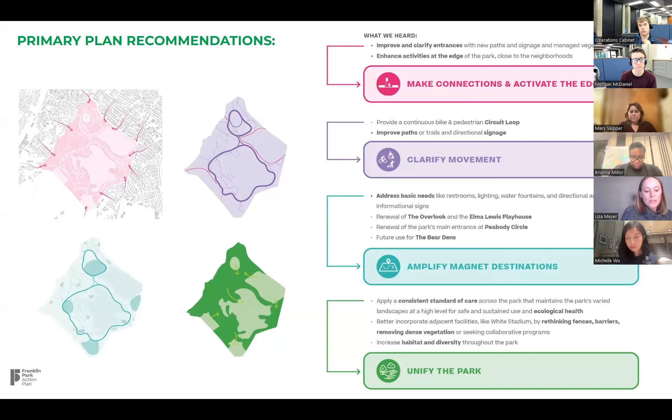These primary plan recommendations focus around circulation, improving the ecological health of the land, welcoming people into the park, and renewing key features, all of which together compose the foundations of this place that we love.

Here we're looking specifically at the Playstead, one of 4 key magnet destinations in the park. It's a destination for athletics, events and gathering, framed by the trees, trails and rock outcroppings at Long Crouch Woods to the east, and the stone terrace of the Overlook to the west. That's number 4, the Overlook, and Long Crouch Woods is 1 and 2. White Stadium sits within this larger space.

As the mayor noted, the Parks Department is working on improvements at the Overlook — we're at the very beginning stages — and at the Bear Dens. Each of these, including work at White Stadium, needs to take the larger Playstead into account when making design and programming choices for these contributing sites. All of these spaces together become the larger Playstead.

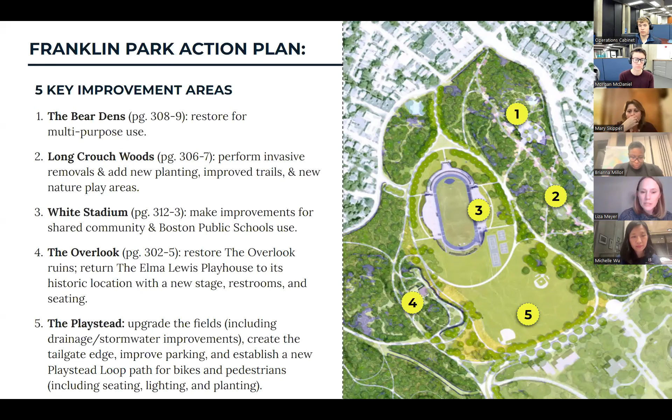The action plan itself reinforces the idea of the Playstead Fields as a central gathering space as conceived by Olmsted. All of the key program destinations surrounding the Playstead will be linked through pedestrian and bike circulation, spaces for spectating and people watching, and restoration of natural features.

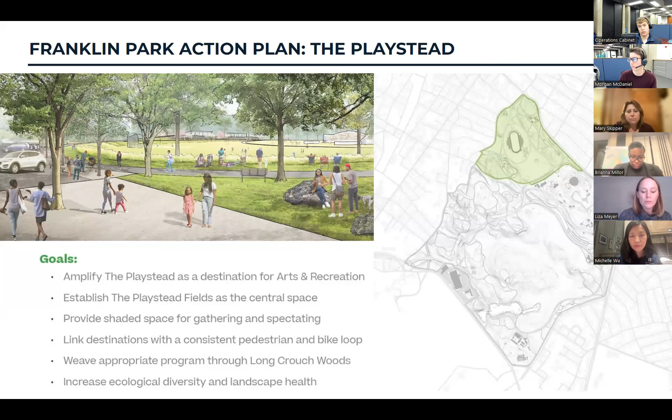As those of you who have been closely involved in the action plan process know, the plan recommendations extend across management, maintenance, and capital investments. To make good on this, the mayor has made significant commitments to plan implementation in all 3 areas. I'm going to pass it to Cathy Baker-Eclipse to highlight some of those.

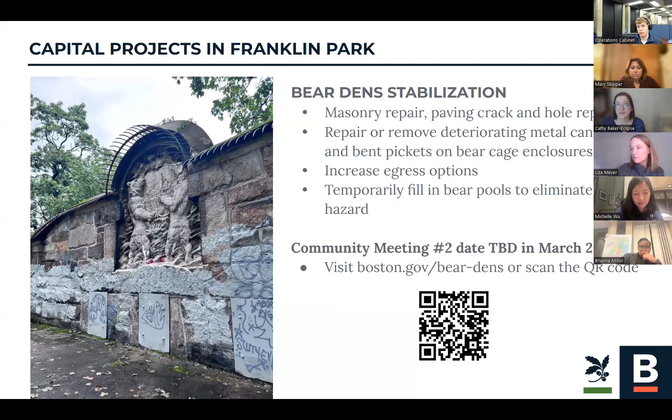All right, next slide.

Highly relevant to the White Stadium conversation we're having tonight is what the plans are for the Overlook Shelter area. The Franklin Park Action Plan recommended returning the Elma Lewis Playhouse to the Overlook Shelter as it was in the 1960s and 70s. We're at the very beginning stages of that work through a programming and design study to figure out what the space needs to accommodate the Elma Lewis Playhouse program and how it relates back to the Playstead. We've received interest in the project from several design firms and are currently reviewing their information.

As we get further into this design process, keep an eye out for more from us throughout 2024 as we have community conversations and work through the schematic design.

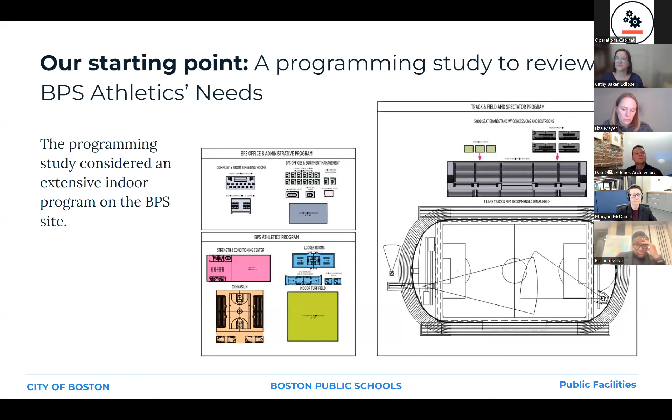As we were considering all of these amazing programs that we wanted to be able to deliver for BPS, the city doesn't have all of the resources that we would want to have to be able to do everything we want to do for our students.

So therefore, we pursued a public-private partnership we're really excited to be pursuing. It's going to allow us to deliver more than the city could do on its own—rebuilding White Stadium to its existing capacity of 10,000 seats, a high-quality natural turf field, plus state-of-the-art student athletic facilities, plus a maintenance partner that will help us sustain the quality of investment.

And besides that, we're excited about the partnership with Boston Unity Soccer because of all the benefits that professional women's soccer brings, including mentorship for student athletes, civic and community pride, and the advancement of women and girls athletics.

So once we had that partnership in place, I will hand it back to Dan to talk about what the rest of that process looked like.

Going back to the programming and visioning exercises we talked about in the prior slide, we looked at adding the indoor courts and a half-size turf field onto the site, and also implementing some of this program on the east side. The buildings started to become larger in size and height, and it felt like we were imposing too large a structure on the park. We wanted to scale back some of the wish list items from the visioning exercises to make this facility more appropriate for the context.

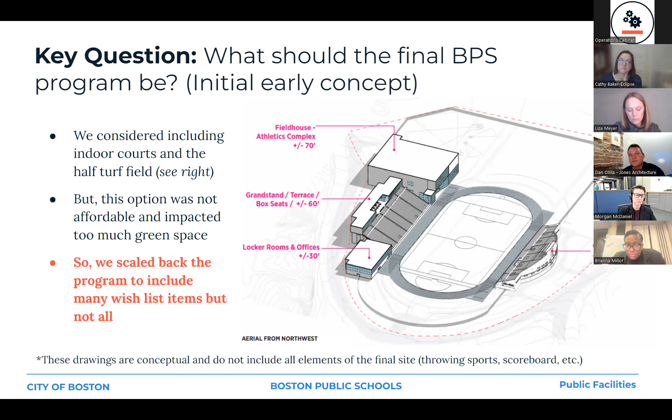So we did a couple different studies to achieve that. If you move to the next slide.

One of the first steps we looked at with the Boston Unity Soccer design team was the possibility of implementing an 8-lane track and a FIFA regulation soccer field onto the site while maintaining the existing East Grandstand. So we did some studies to try to test that out.

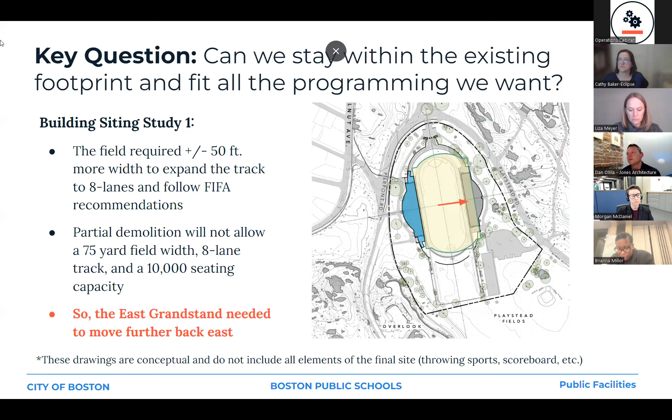And you can go to the next.

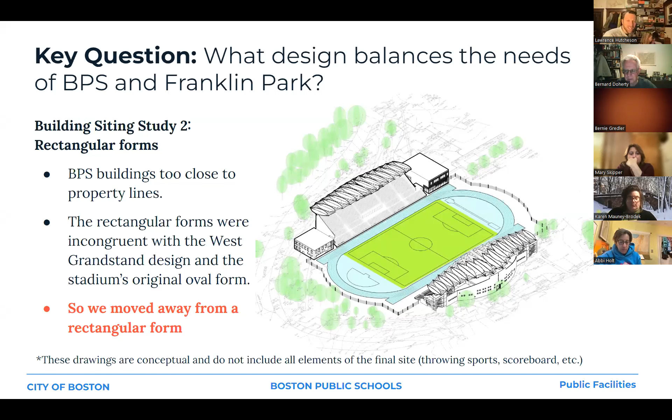So if you move to the next slide, we landed in a place where, rather than make the buildings on the north and south side more square and occupy more horizontal area throughout the park, we made them much more narrow and longer, hugging the shape of the track. As you'll see in more slides about the development of the Grove and West Side area, these building forms and this approach to siting start to unify the two ends of the stadium, even though there is an openness in between each side at the north and south.

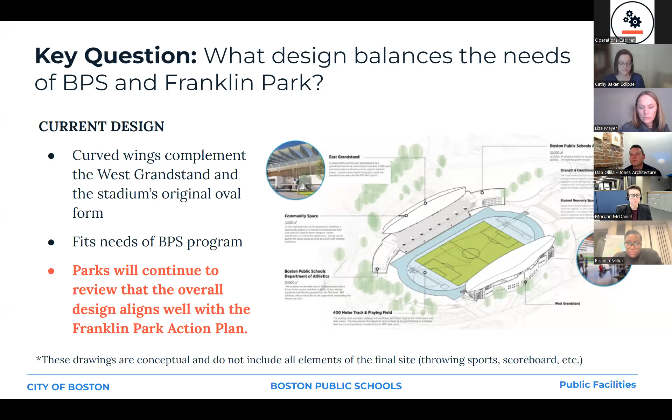You can move to the next. I will pass it to JP from our landscape team to talk in a bit more detail about how this fits into the Franklin Park Action Plan.

Thanks, Dan. Good evening. My name is Jean-Paul Charbonneau, but I go by JP. I'm a Boston resident living in Dorchester, about 1.5 miles from Franklin Park. I'm an associate principal with Crowley Cottrell, the landscape architects on the BPS side of the White Stadium project. I'm here to talk about the future improvements to the site.

Before we begin, I'd like to show this drawing to illustrate how the stadium project is split: the Boston Unity project shown in purple and the BPS project shown in orange. The city and the Boston Unity teams are working together to ensure this project feels cohesive and unified. Next slide, please.

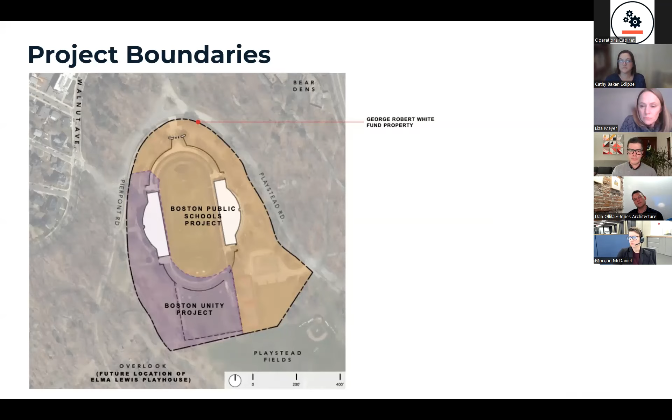This drawing is an overlay of all the new and expanded buildings for the project, shown in blue, which include the West Grandstand for Boston Unity, the East Grandstand and the two wings for BPS offices and fitness center, the expanded track and field, and the Grove buildings. Next slide, please.

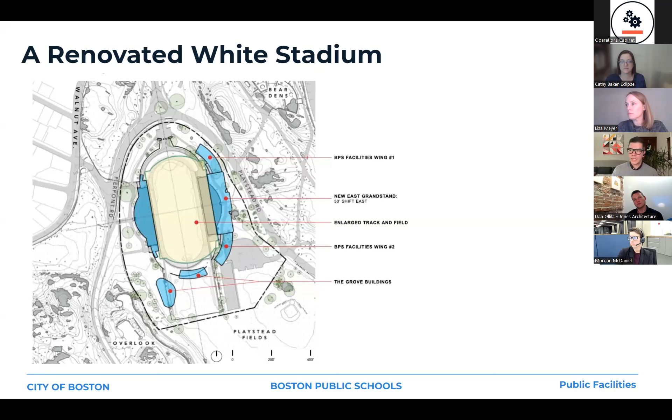Shown here is the combined site plan. I will describe the various aspects of the plan in more detail in the next slide, but more importantly on this slide are the overall goals from the action plan and our primary objectives with this project.

It would be impossible to reduce the action plan to one slide, and to do so would be a disservice to the amount of time, thought, and community feedback that went into it, but these would be those four principles taken from the action plan itself. Below each goal is a description of how we intend to achieve them. In the interest of time, I will not read through these bullet points, but I will touch on these as we walk through the site plan.

The only thing I would add: these goals not only apply to our site, but it is on the project team to consider how our site affects these goals for the park. Our challenge and primary task is to make the stadium feel integrated with the park. We put these goals to the test.

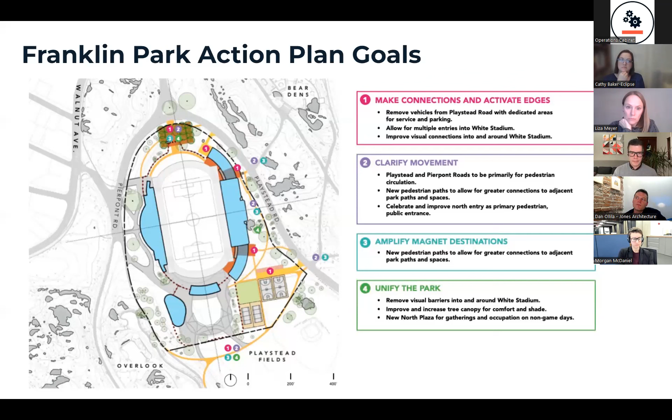Now a little more information for the combined site plan. Before I get into it, I want to state that we are at the very early stages of design. This is very much a concept of what is possible. Nothing is set. All options are on the table. But we show this now because we want to use this opportunity to share some of our early ideas, to begin our conversation, to get your feedback, and to provide you all with a fuller understanding of the changes we are studying. I understand there's a lot of information on this page, and it is a lot to digest.

We will have more conversations, and in future meetings, we will provide additional drawings and details as we test and study how these changes will look and feel. I will try to explain this drawing as briefly and as completely as I can.

In this drawing, Boston Unity's scope and paving are shown in gray, and the BPS project highlighted in orange and red colors. The orange color indicates walking paths, and the red tone indicates paved areas for gathering and entry. I will let the Boston Unity team talk more about the specifics of their design, and I will speak to the BPS scope and design ideas.

I will start from the north and work our way clockwise around the East Grandstand. Our first attitude and position is that we believe the north entry is an important public space. The entry through the box office gates was historically a primary entry point into the stadium and very visible from the approach from the School Street and Walnut Ave Park entrance.

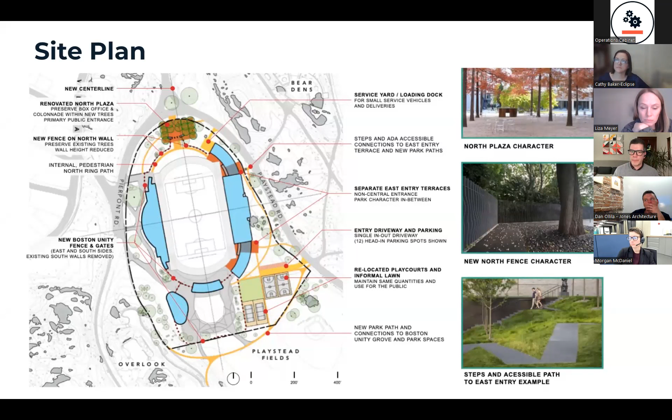JP, any closing remarks? No, thank you. Thank you for your time. All right, thank you so much, Dan and JP.

I just want to emphasize that the things you've seen for the East Grandstand, the landscaping on the east side, we are early in the process, but we heard from you that you wanted to see the full picture. So we wanted to share that with you, even though as you've heard, there are many things that are still in flux, items that we know we're going to have to take another look at. We look forward to coming back to you with more details as we work through those things.

So as our next topic, I want to provide some updates on transportation.

First, just want to take stock of where we are with transportation planning. There's been a history of large gatherings in Franklin Park that have all shared transportation challenges. We've heard this from many residents on all sides of the park. These events have never had transportation plans, right? We've never had a coordinated approach to managing their transportation challenges. We know that professional soccer games will also have transportation challenges, but we are going to implement a comprehensive and thoughtful plan to address those.

We've shared broad plans for transportation, but we understand that now is the time to dig further into the details. So big picture, Boston Unity Soccer is in the process of sharing proposals with the city for the details of game days. I'll talk more about that in a moment. And the city, with our architecture team, is developing transportation plans that speak to the specific needs of BPS athletic uses, as well as other large events that take place at the stadium and on the Playstead that clearly need transportation plans.

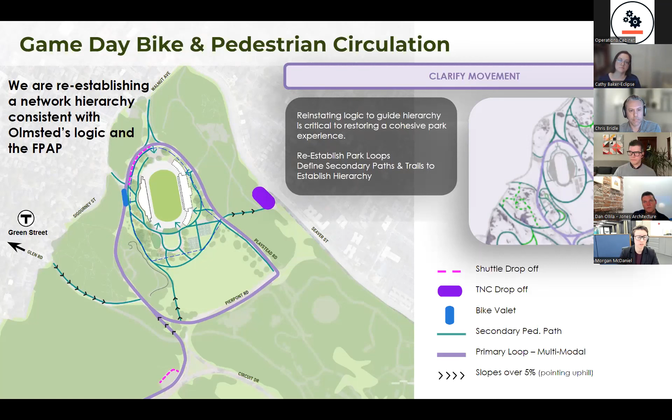Another topic that we've heard a lot of questions about is public access, and what will public access look like to the new stadium and the Grove area.

I want to restate a few of the themes that we've heard and values that we share and agree with and are trying to honor throughout this project. Number one is prioritizing BPS and community use of the stadium, the Grove, and the Playstead. Number two is expanding public access to the stadium, which includes the track, running stairs, and public bathrooms, improving the quality of our facilities, ensuring that the events that call White Stadium and the Playstead home can remain, and establishing the Grove as a newly accessible, publicly accessible gathering space.

We want to provide a clearer picture of what's available now versus what the new project will provide. Currently in White Stadium, the building is not open—well, the stadium is open 7 a.m. to 4 p.m. on weekdays. It's closed on weekends, so it's not available in the evenings or on weekends when community members might want to run around the track or run on the stands. For BPS, the poor quality of the field limits use to about 250 hours per year.

In the renovated stadium, we are going to be increasing the hours of operation into the evenings for community use and weekends. The new high-quality field will be able to have the standard use for a grass field, which is 750 to 900 hours per year—at least tripling the amount of hours the field can be used.

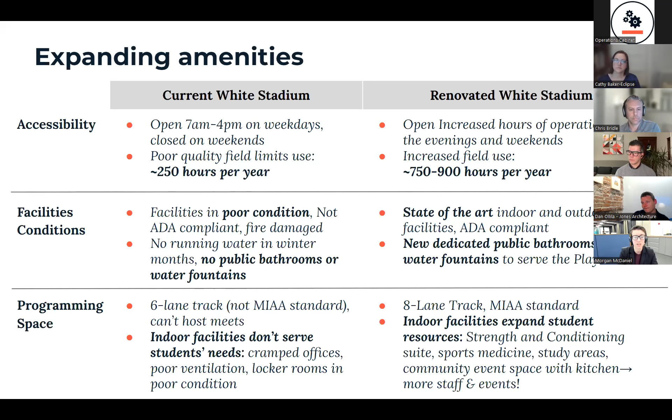We really just want to make it clear that with this project we're bringing a new user into the stadium, but we are expanding use as a whole. We're not talking about a zero-sum game.

You can see in this chart, in the top line, the current hours BPS students are able to use the field, about 250, is so low for a grass field. In the future, we'll be able to get up to 800 hours at least, which will allow us to greatly expand BPS soccer and BPS track and field.

You'll see that BPS football is on here as well. Currently, about 40 hours a year of use for BPS football. Two BPS football teams play about 5 games a year each. We've discussed this before, but in the future stadium, those teams will have to find other home fields for their regular games.

But after the soccer season is over, we will be able to bring many more teams to do end of the year rivalry Thanksgiving games. So the number of hours stays constant, but the composition changed slightly. We do want to emphasize that we're working on finding temporary and permanent locations for those football teams.

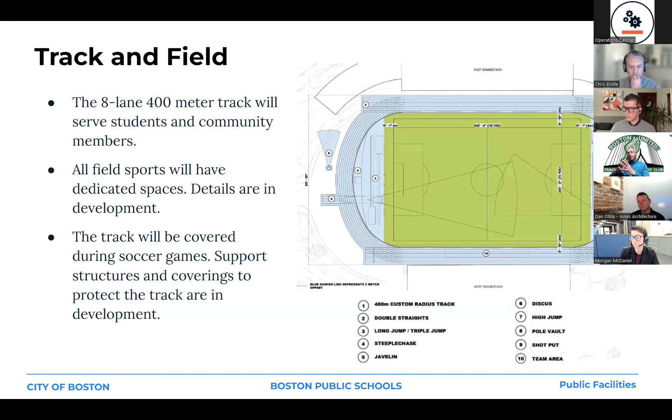I also want to speak to the cross-country program. We've heard many cross-country enthusiasts speak up about the importance of this cross-country course, and we offer to be part of making sure that it is preserved and cared for the way that it deserves to be. We want to emphasize that we understand that this course is historic. It is going to remain, and we also understand that it requires unpaved paths, and those paths will remain unpaved in the future so that the cross-country course can continue.

The next and last item on public access we're going to talk about is the proposed Grove program, an amenity that the community will be able to access and use and program. I'm going to hand it to Tamara on the Boston Unity Soccer team to speak more about that.

Thanks, Morgan. I'm Tamara Roy, Principal of Architecture at Stantec. The Grove, we are working with the city to design to support a huge variety of programs that promote community gatherings and draw people to Franklin Park. Following the Franklin Park Action Plan, we will provide electric and water infrastructure, as well as shading, outdoor furniture, refreshments, heat lamps, and more to support the park's large events and festivals, as well as its new programming. The city will be looking to community members and vendors for all their program suggestions.

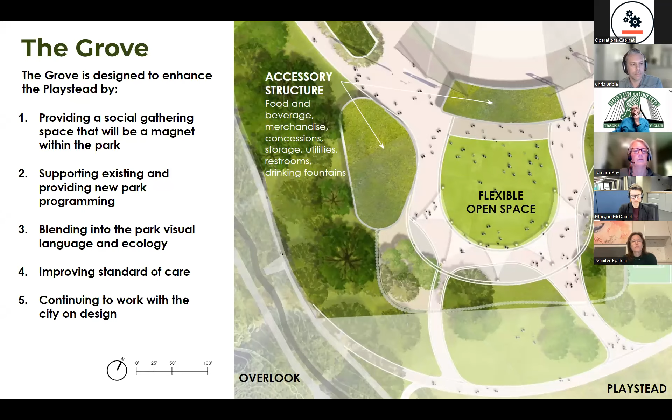This is our proposed design of the Grove today, as viewed from the Playstead. As mentioned previously, we are creating new, welcoming, ADA accessible, daily public access to the Grove. The new planted edges of the Grove will be much more visually permeable to allow expansive views into and out of the Grove. Our proposed buildings are designed in their respective context to be part of the stadium language and the organic, informal language of the park. All the existing trees illustrated in this image are being preserved, and new groupings of trees are proposed to provide much-needed shade and further integrate into the Grove and into the Playstead.

Here you see the alignment of the proposed Grove perimeter fence. We're proposing a fence bronze in color that will be visually permeable and planted with native species and vegetative understory to obscure the fence line and blend it into the park, in alignment with the Franklin Park and BLC guidelines.

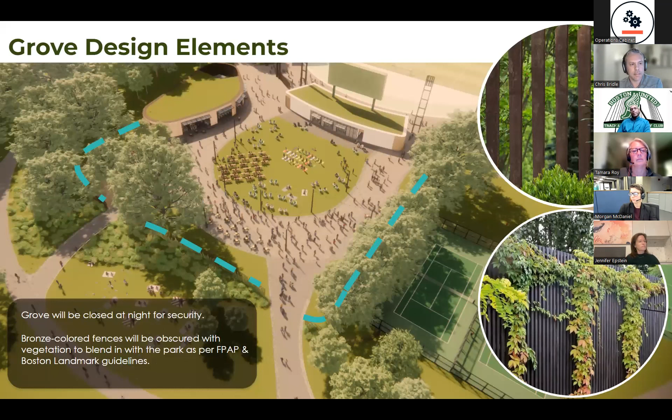The fences and gates surrounding the park will be configured into three states: for daily use, game day and ticketed events, and at nighttime, when the Grove will be closed, to secure movable furniture and other loose elements. The Grove will be open daily with wide, welcoming thresholds. And I'll hand it over to Tamara.

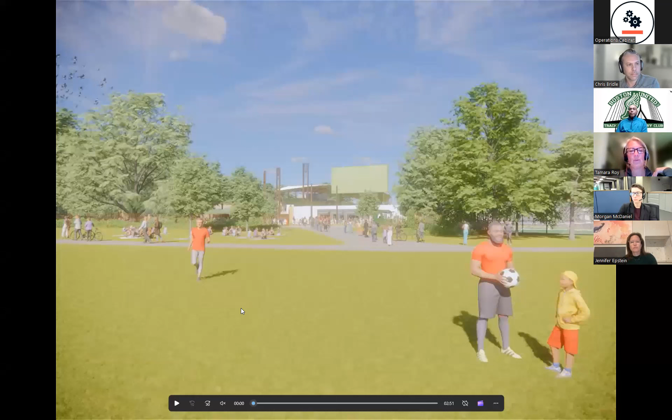We now have a short walkthrough animation that shows a typical day, not a game day, in the life of the stadium, walking from the Playstead through the Grove and then flying above the field and ending at the West Grandstand. We thought a picture was worth 1,000 words.

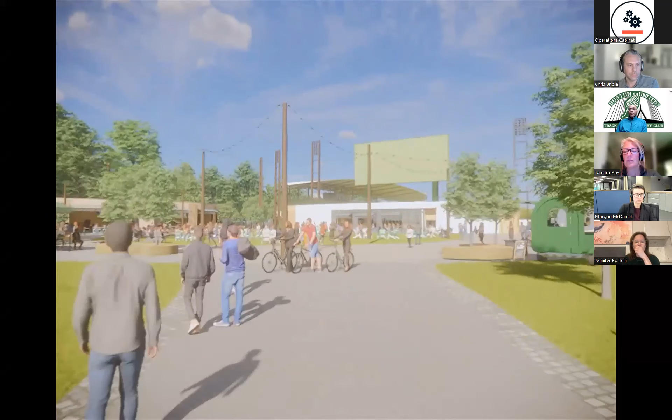So the Grove, as has been said, is open to the Playstead and to the stadium. And while there is a fence for nighttime security, the gates will be open nearly all of the time. You're also seeing the back of the new scoreboard. The side facing the Grove will only be used for content on game days and special occasions, such as movie nights. The central green space will be for community-driven programs, such as exercise classes, drum circles, performances, story time in the park, kids tumbling, etc.

The furniture will be movable. The accessory structures we have kept low so they don't obscure views from and to the Olmsted Overlook. And we are thinking of programs such as barbecue and pizza.

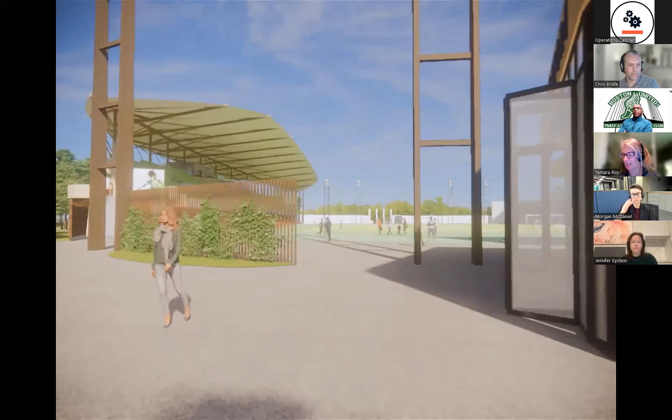Now, as you come around to enter the stadium, it's in its most common track and field configuration. You're also seeing the renovated stadium sides, the east and west grandstands, and their shade canopies and new seating, ADA accessible elevators and stairs up to the concourse levels.

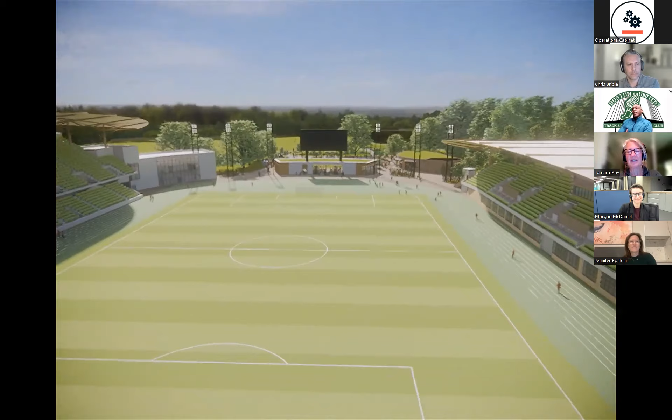Now, as I mentioned, we're just going to pretend we're a bird and fly back here and look at the stadium from afar. You can see the blue hills in the distance. And we're going to come around and just end at the west clamshell wall. Thank you very much.

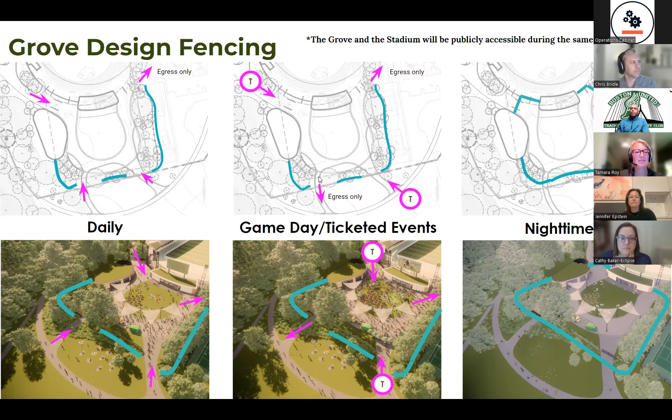So next steps on Grove design, we've received a lot of community feedback. And so in response to that feedback, the city is going to be engaging with Reed Hilderbrand, the landscaping firm that worked on the Franklin Park Action Plan itself, to ensure the Grove and White Stadium renovation design is aligned with the action plan and considers the value of the existing cultural assets and the cultural landscape. Boston Unity Soccer has agreed to continue refining the Grove design and the digital scoreboard in response to public comments, and we will continue to share updates.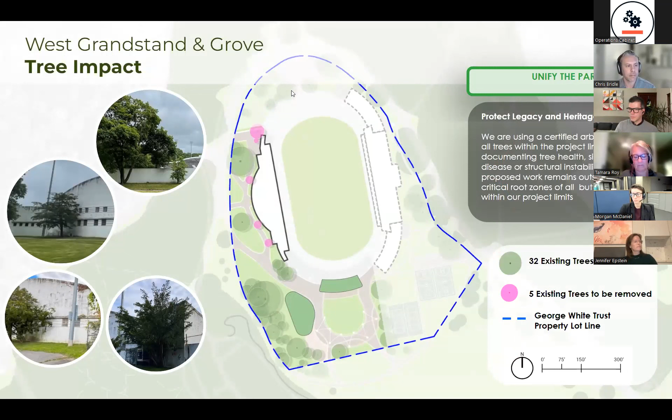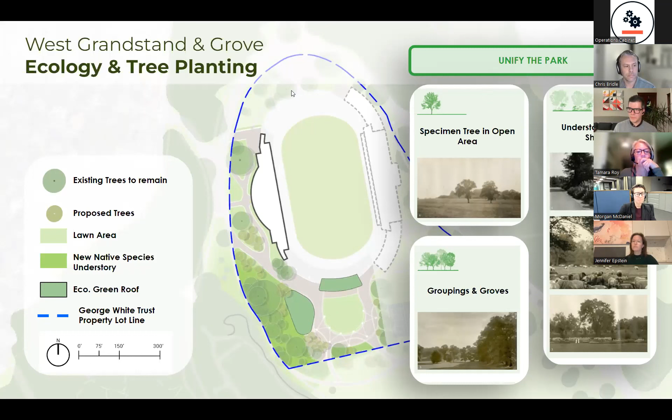Another topic that I know is very important to those who use the park regularly and live around the park: noise, light, maintenance, safety, and other quality of life issues.

We've discussed it previously, but want to be very clear that Boston Unity Soccer will be making legally binding commitments regarding minimization of noise, lighting, full cleanup after events, and professional security. This language will be memorialized in the cooperation agreement, which is the document at the end of the Article 80 process between Boston Unity Soccer and the Boston Planning Development Agency. The language will also be mirrored in the lease with the city and the MOU with the Parks Department as appropriate. Specific language is currently being drafted and will be shared with the Impact Advisory Group for review at their next meeting, which is on 2/26.

Tamara and Jen will speak a little bit about what those commitments will look like. The entire city and Boston Unity Soccer Partners project will be highly sustainable under the New Stretch Energy Code and all electric. Improvements to address existing flooding around White Stadium are currently in process with our site civil engineers. We're also working closely together with the East Grandstand team on the lighting plans for the stadium and the Grove, and we'll have more information on that topic for future meetings.